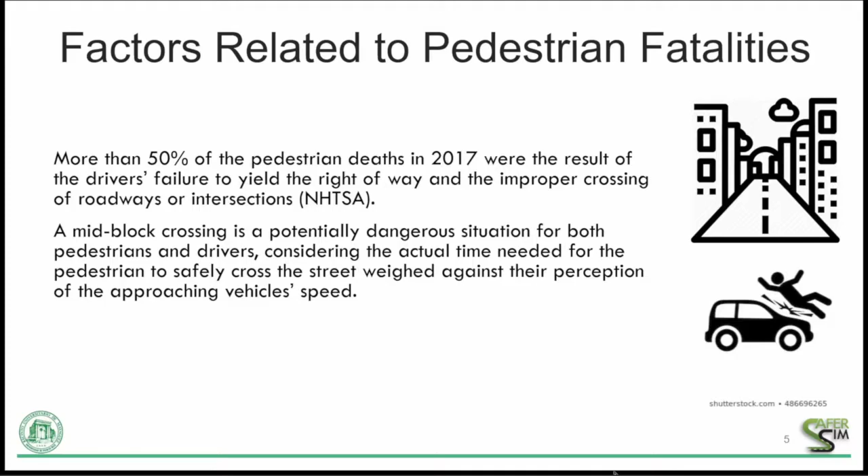Now, the 2 main objectives of our project are, first, to evaluate the effectiveness of enhanced traffic control devices on reducing speeding behavior and increasing speed limit compliance, and second, to study the behavior of drivers when they encounter a conflict with a pedestrian at an uncontrolled mid-block crossing.

Our methodology included the typical tasks of a research study, from literature review to conclusions and recommendations. 2 tasks that I want to highlight in our methodology are the online survey and the 2 driving simulator experiments. Dr. Benjamin Colucci will talk now about the online survey and the first simulation experiment. Dr. Colucci.

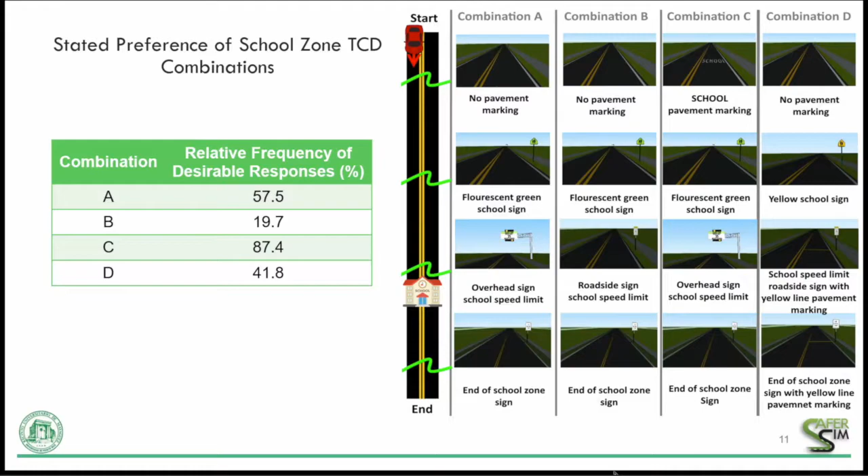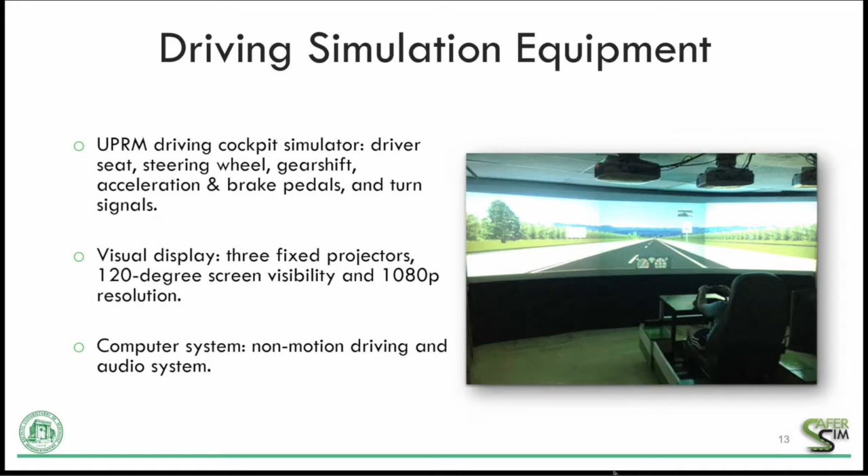Our first case study that we're covering is associated with the secondary unit Samuel Adams School. That school's main access is through Highway PR-2, a 4-lane high-speed divided arterial that is part of Puerto Rico's national highway system. It's under the Puerto Rico Department of Education and teaches students from pre-kinder to 9th grade with an enrollment of approximately 900 students. The annual average daily traffic is 35,000 vehicles per day. The posted speed limit is 45 miles per hour and the designated school zone limit is 25 miles an hour.

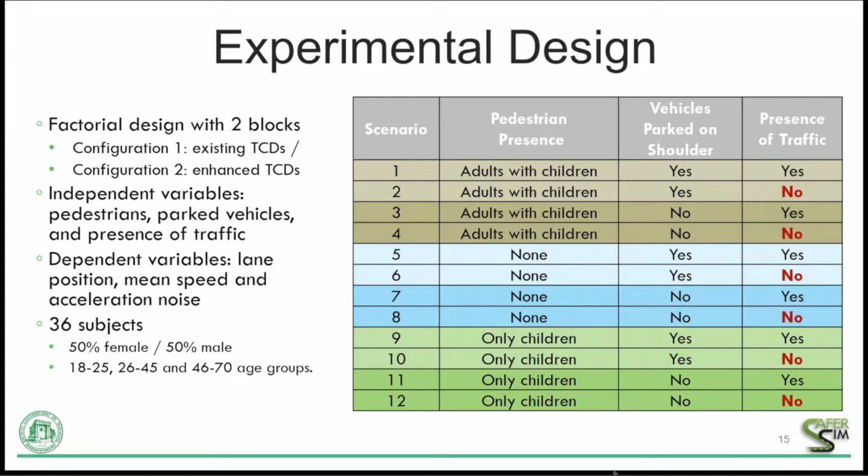Next one. The experimental design used in this project consisted of a factorial design with 2 configurations: the existing or current configuration with the traffic control devices in place in Highway PR-2, and the proposed configuration with the enhanced traffic control device following the design specifications of the FHWA Manual on Uniform Traffic Control Devices, having the corresponding flashing beacon and overhead sign. The three independent variables that were evaluated are the presence of pedestrians, vehicles parked on the shoulder, and the presence of vehicular traffic in Highway PR-2.

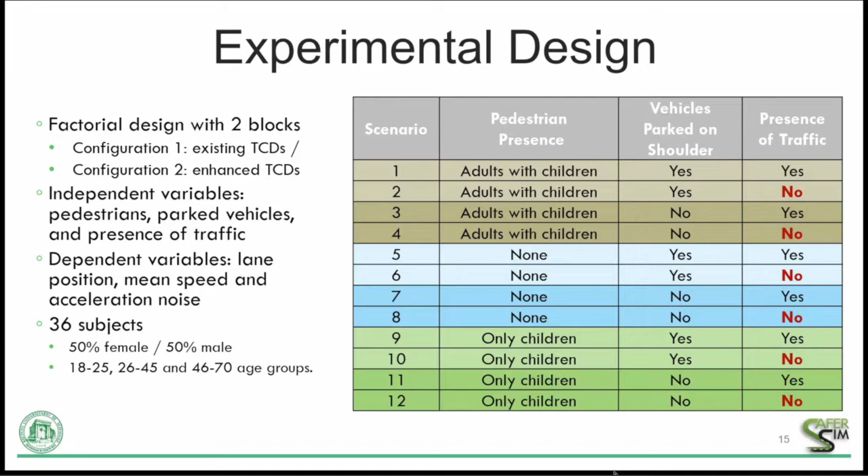The three dependent variables that were evaluated in this experiment are lane position, mean speed in miles per hour, and acceleration noise. A total of 36 subjects participated in this research study, with essentially a 50-50 split in male and female drivers, representing three age groups: 18 to 25, 26 to 45, and 46 to 70. Next one.

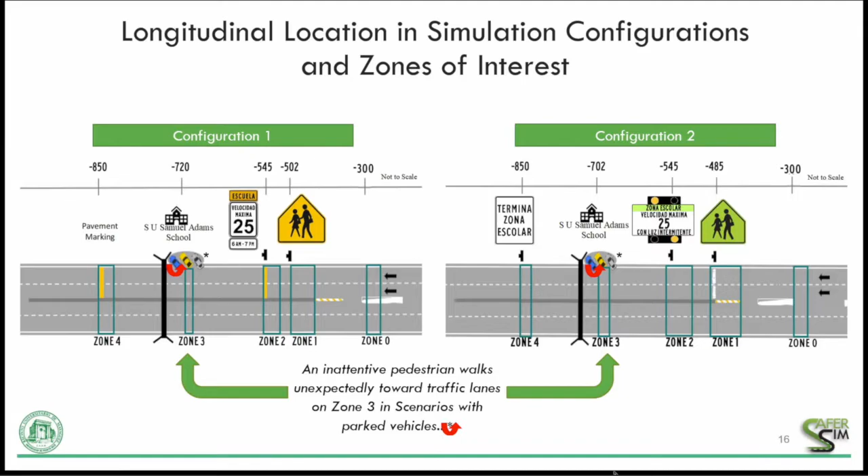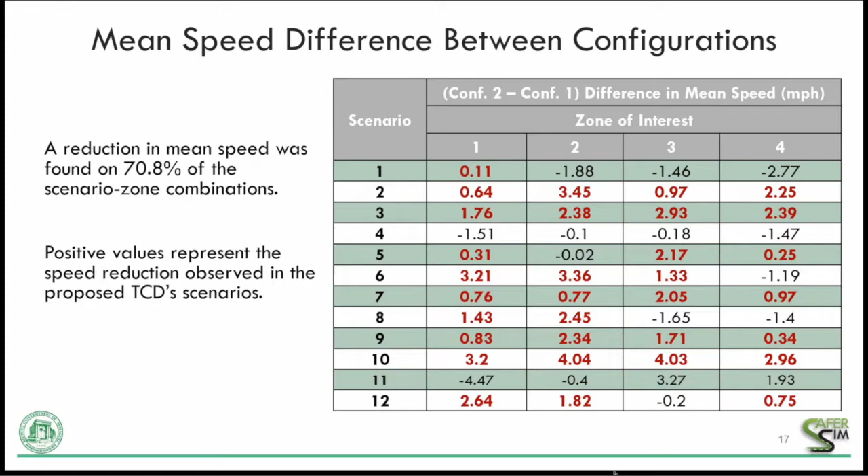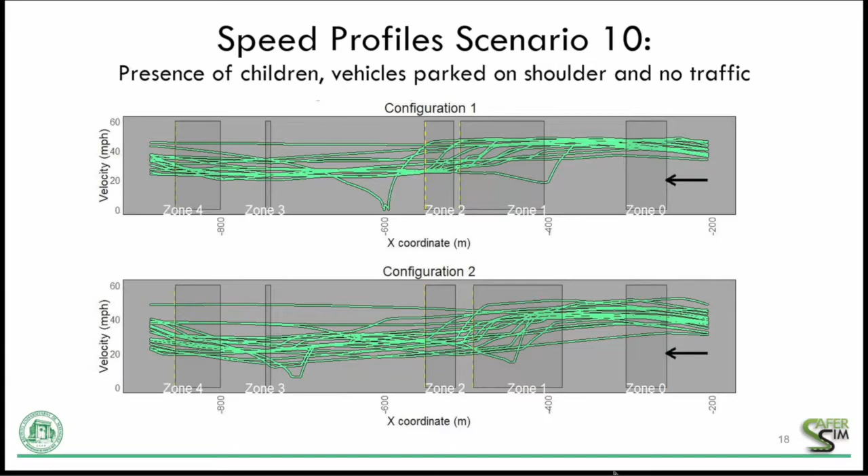And the last one in this section of the first case study, another pertinent finding was the increasing compliance with the school zone speed limit in zone 3 in percentage. From the table, you can see the 12 scenarios, and you can see configuration 1 and configuration 2 showing zone 0 and zone 3, and the compliance, which is the difference on both in percentage. Essentially, the increase in compliance with school zone speed limit was in the range between 5.6% and 27.8%, and the red values that are shown in these cells represent a higher speed compliance observed in the proposed TCD scenario configuration number 2.

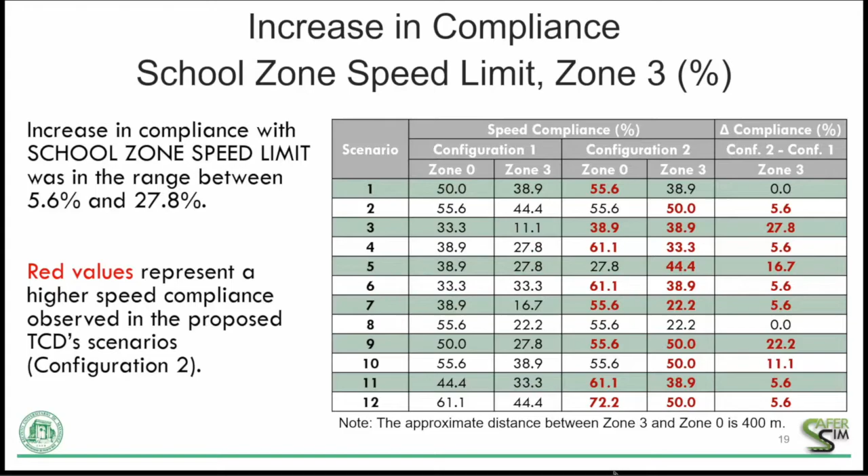The second site we studied was the Franklin D. Roosevelt in the city of Mayagüez. The access to this elementary school is through a side street that is parallel to the arterial highway PR2, the same highway we talked about in the previous school. But in this case, on the left side of the school, there is a signalized intersection and the access to the side street. Another entrance from PR2 is located on the right side of the school. This time, the PR2 highway has 6 lanes with more than double the AADT than for the Samuel Adams School described earlier. The speed limit is 40 miles per hour, but the observed 85th percentile in this location was 53 miles per hour.

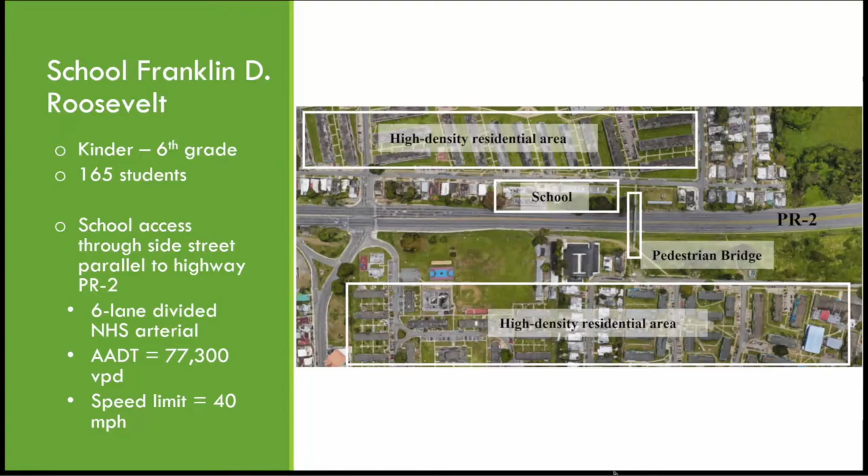Adjacent to the school, there are 2 residential areas and a government center, not pictured, that generates significant pedestrian traffic along the corridor. Even though there is a pedestrian bridge at mid-block, this bridge is not ADA accessible. Therefore, pedestrians crossing the PR2 roadway at mid-block is very common because they will not or cannot use the bridge and are not willing to walk up to the signalized intersection.

This experiment included 6 scenarios with 2 independent variables. One, the time of day, and second, the pedestrian crossing direction. 2 configurations were used, similar to the previous experiment, one with existing traffic control devices and another with enhanced traffic control devices. The order of the scenarios was assigned randomly for each driver. The experiment was conducted using 12 different drivers for each configuration. That totals 24. The gender was divided 50-50, and we had subjects from 18 to 68 years old.

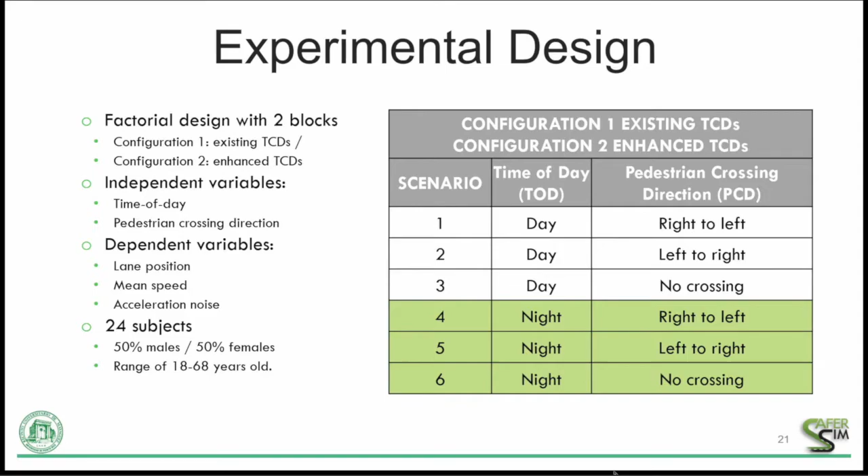The enhanced traffic control device that we used was an overhead warning sign with flashing beacons, similar to the previous one, but in this case with a different text, since there is no school zone along this segment, but we have the safety issue with pedestrians walking along the segment and crossing PR2. So the text, cruce de peatones adelante, translates to English as pedestrian crossing ahead. The objective was to evaluate if the enhanced traffic control device helps in reducing the number of pedestrian vehicle conflicts at the PR2 segment.

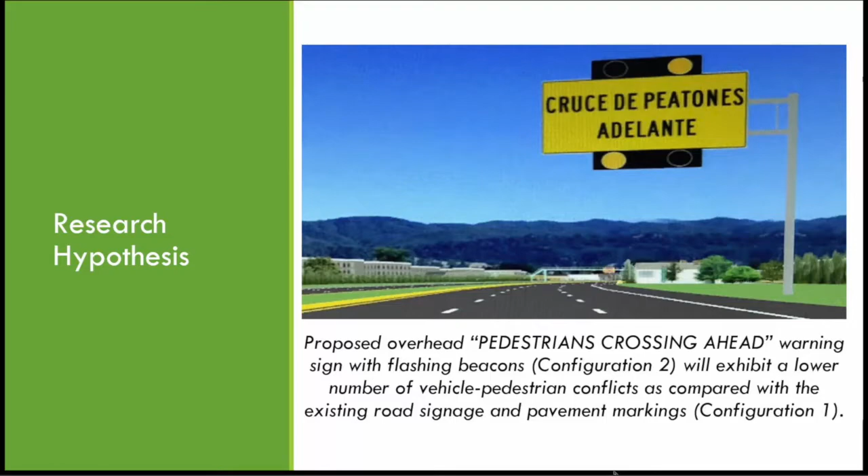Let's watch a video of a simulation scenario with the existing traffic control device. The driver started at the shoulder and was free to select any of the 3 travel lanes. The only information provided to the driver was the speed limit and to drive straight along PR2. Notice the shoulder on the right side and the sidewalk is located on the left side. There is also a horizontal curve to the right before reaching the school.

One detail I didn't mention was that this scenario included the pedestrian crossing from the right to the left of the roadway, coming from the side street, like simulating a pedestrian that didn't use the pedestrian bridge. The driver was not told about the presence of that pedestrian crossing the roadway.

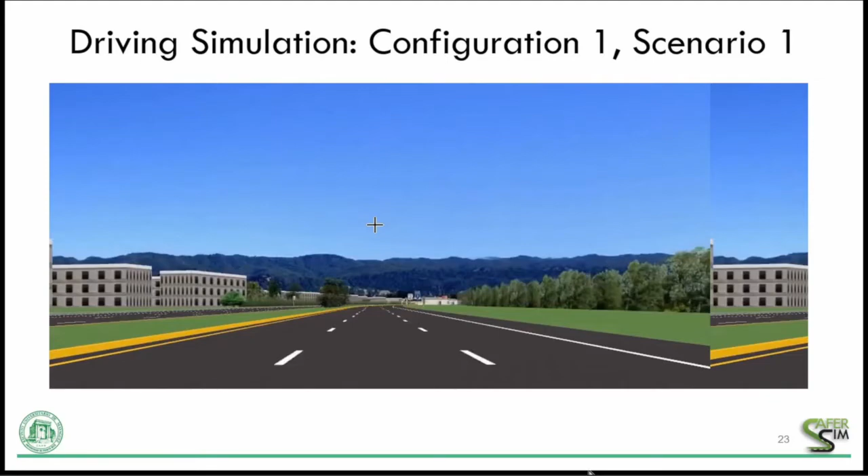This experiment was designed to create a potential conflict between the driver and the pedestrian crossing the road. The pedestrian was programmed to not react to the presence of the vehicle and walking at a constant speed of 6 feet per second. 3 zones were used to analyze the driver behavior.

Zone 1 was a position where the driver was assumed to drive at free flow speed well before the overhead sign. Zone 2 was located after the overhead sign, so the driver was already warned about the possibility of pedestrians on the roadway. At this zone, the pedestrian was still not visible to the driver. And Zone 3 was the conflict zone, used to detect the reaction of the driver to the presence of the pedestrian.

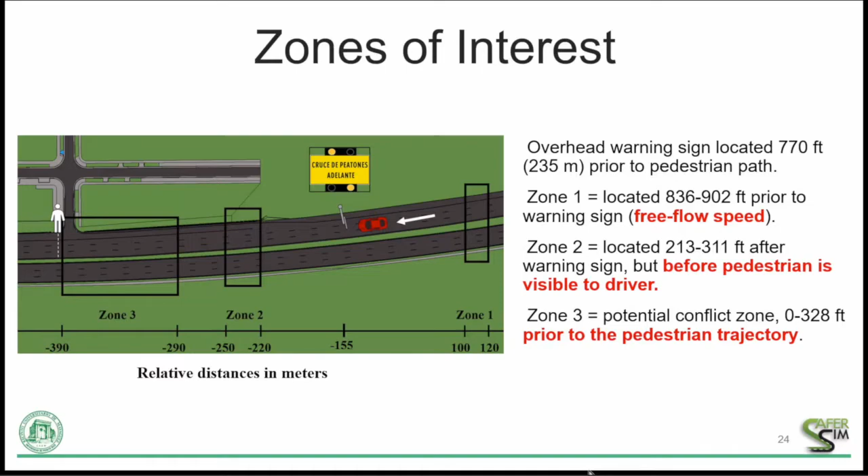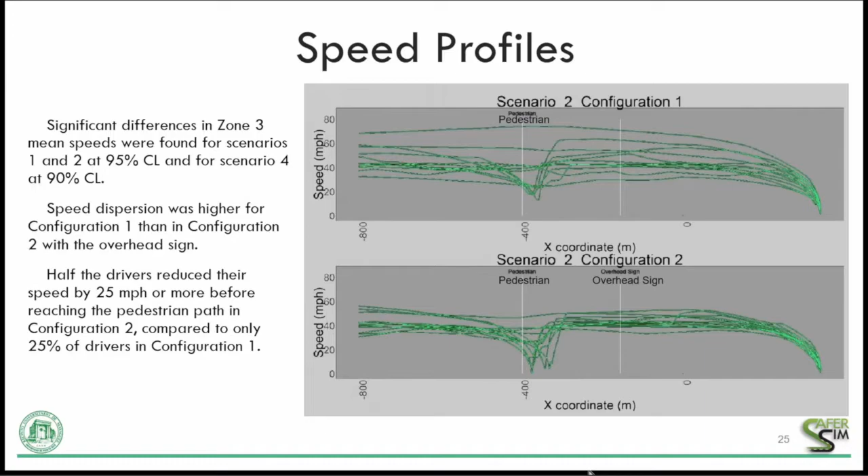So we went further and studied the conflict between the driver and the pedestrian, and we evaluated a zone 250 meters long prior to the pedestrian path. The left graph represents the position of the vehicle and the pedestrian. In this scenario, the pedestrian was crossing from the right shoulder to the median. Each point on the graph represents the positions at 1 second intervals. The dashed lines represent the center line of each travel lane. On the right graph, we can see the vehicle speed at each position.

2 seconds later, at point 7, the pedestrian is reaching the center line of the middle lane, and the driver has reduced his speed to 45 miles per hour and started to change to the right lane to avoid hitting the pedestrian.

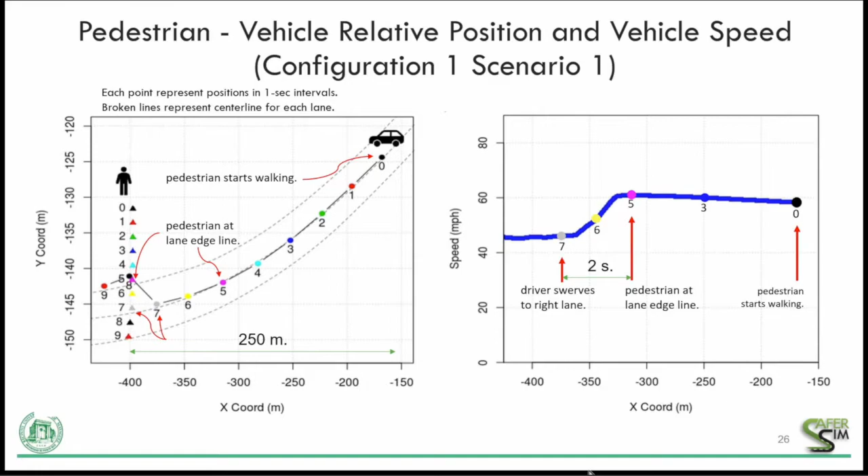With this type of analysis, we analyzed conflicts from points 0 and 5 to evaluate if the overhead sign had an impact on the number of conflicts. The results show that the scenarios with the overhead sign were associated with a lower percentage of conflicts on 6 of the 8 locations analyzed.

On the right side, you can see a graph that shows the avoidance maneuvers selected by drivers when facing the conflict with the pedestrian. Almost half of the drivers decided to brake when facing the pedestrian. The percentage of braking-only events was lower on the scenarios with the overhead sign. Lane change with or without speed changes were less selected by drivers, even though the scenario didn't have ambient traffic. So this decision raised the flag that the decision to brake could have a negative consequence of rear-end crashes under heavy traffic conditions.

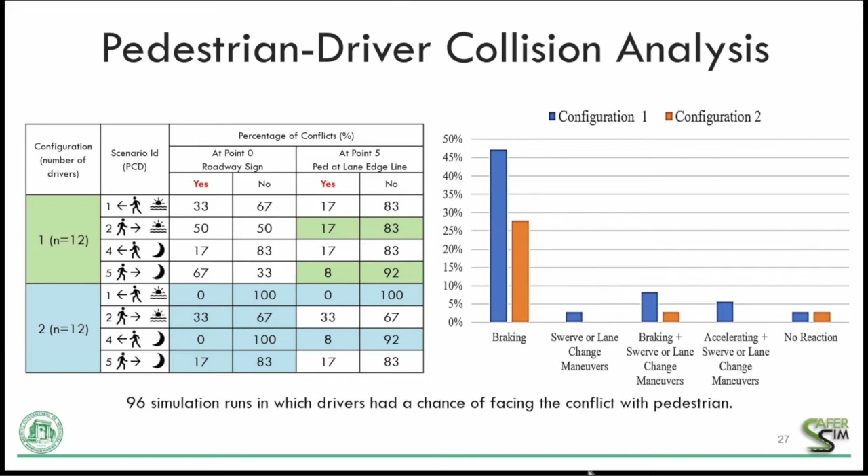The last analysis we performed in this case was a model that we calibrated to identify factors that define the chance of a driver facing the conflict with the pedestrian. Overall, 3 factors were found to be significant. The model indicates that the pedestrian crossing direction from left to right increases almost 4 times the chance of having a conflict with the pedestrian. Notice that the road has a horizontal curve to the right, so the driver's eyesight could be fixated on the white pavement marking on the right side to follow the road geometry without noticing the pedestrian coming from the left side or the other direction.

The model also confirms the positive safety effect of the overhead sign. The results confirm the overhead sign with flashing beacons decreases by 65% the chance of a conflict by making drivers more aware and alert of the presence of pedestrians crossing the road.

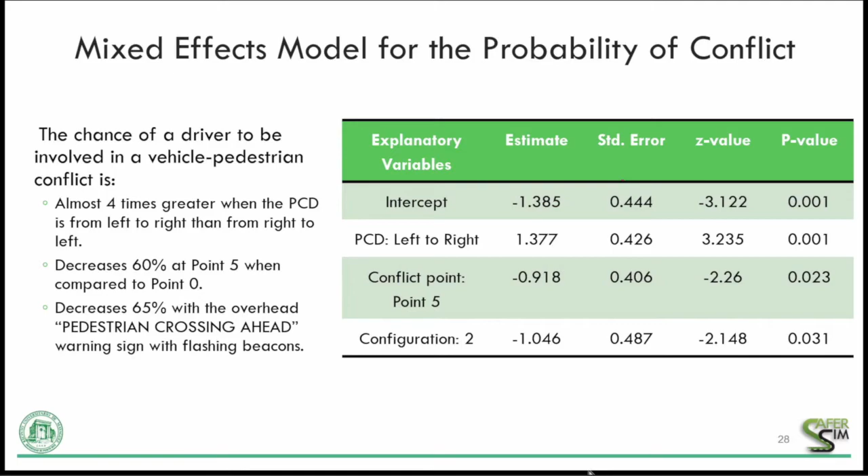In terms of conclusions, I'm only going to highlight a couple of aspects that we found in the online survey and the 2 simulation studies. From the survey, one of the major conclusions is that half of our drivers lack understanding of the fundamental meaning of the school zone sign and the school crosswalk sign.

From our school zone experiment, it was found that by providing information in a clear and more visible way, it is possible to reduce speeding and crash severity. Our proposed traffic control device configuration showed a reduction in mean speed and also higher compliance with school zone speed limits.

From our mid-block crossing simulation study, one conclusion is that the proposed enhanced overhead warning sign was effective in alerting drivers of the presence of pedestrians crossing the roadway. We also found that braking was the driver's main response in 86% of the cases when they were in conflict with the pedestrians in the mid-block crossing.

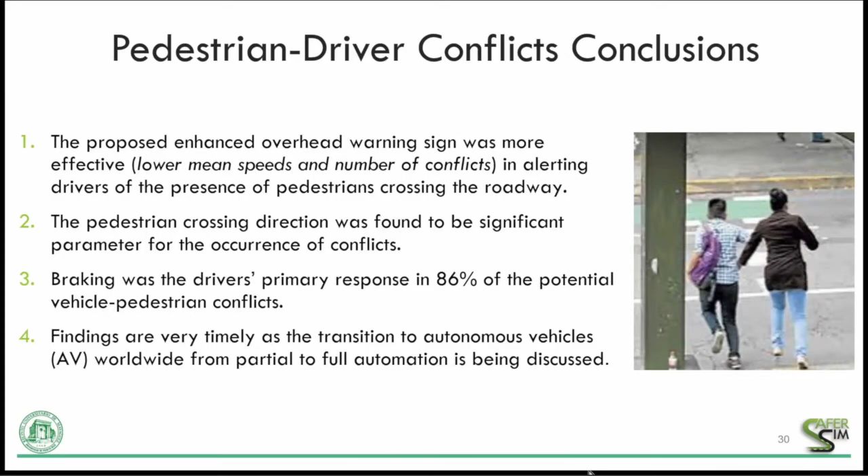In addition, the direction in which the pedestrian was crossing was found as one of the significant factors for the driver's reaction. We understand that these findings contribute to the discussion in the transition from partial to full automation in the autonomous vehicles development worldwide.

Based on the simulation results, it's recommended to apply innovative signage to improve safety in school zones and also continue further studies on vehicle-pedestrian interactions. We understand that the topic of vehicle-pedestrian interactions is of special concern for ongoing automated vehicle research. We would also recommend to expand the current virtual simulation research on pedestrian gap acceptance to include multi-lane arterial streets.